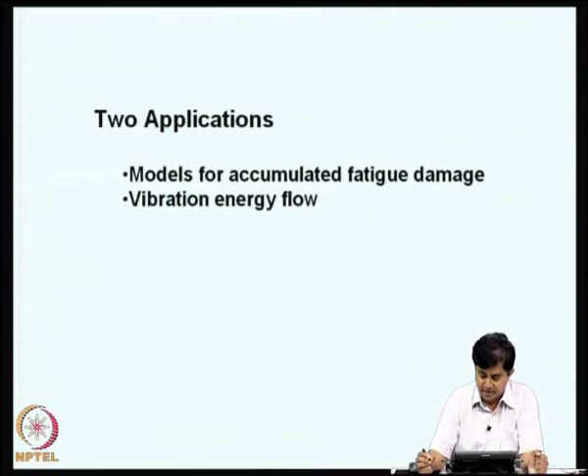We have been discussing application of principles of random vibration to problems in earthquake engineering, and will continue with discussion on applications. In this lecture I will consider two more applications: one is models for accumulated fatigue damage in randomly vibrating structures, and the second is vibration energy flow, which is important for high frequency vibrations of engineering structures. I intend to give a flavor of these two application areas and illustrate how principles of random vibration analysis are employed, not to fully describe fatigue damage or energy flow problems, but to state the basic problem and show how random vibration principles could be used. We will start with the problem of fatigue damage accumulation, beginning with some empirical background.

What is fatigue? Fatigue is loss of mechanical integrity of a structure due to reversal of stresses. Any structural material, even on very fine scales, will have some imperfections and defects. Consequently, the strength of the structural material in a given volume depends on the amount of defect present. When the material is subjected to vibratory loads, there is reversal of stresses, and as a consequence the defects and imperfections grow within a given volume of structural material, reducing its strength. This phenomenon is what is known as fatigue.

Fatigue is essentially a phenomenon involving progressive fracture of a structural member due to repeated cycles of load. It is the primary mode of failure for metals subjected to oscillatory loads, and is a major source of failures in aircrafts, railway vehicles, ships, bridges and rotors. Structural components that can carry high constant amplitude loads fail under substantially lower magnitude fluctuating load, due to fatigue. During fatigue failure, the maximum stress could be well below the tensile strength of the material, but the structure fails after oscillating for a finite number of cycles.

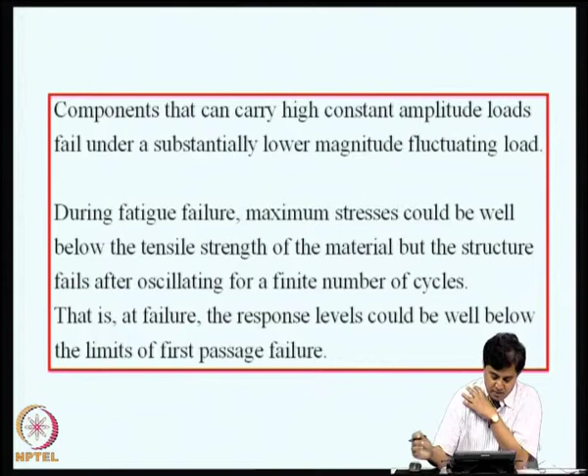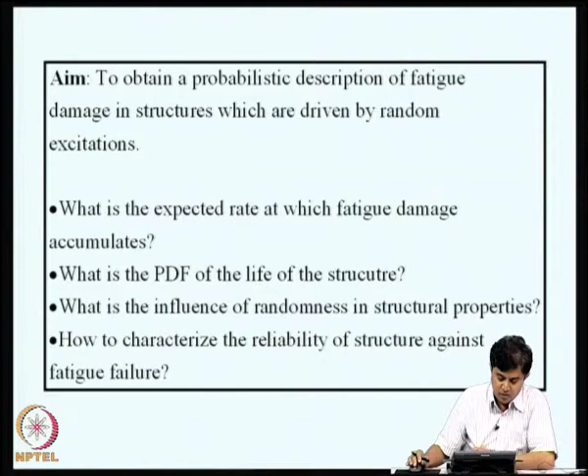At failure, the response level could be well below the limits of first passage failure, so failure could be quite catastrophic. It is important to obtain a rational description of how to model these failures. The objective is to obtain a probabilistic description of fatigue damage in structures driven by random excitation. For example, what is the expected rate at which fatigue damage accumulates, what is the probability distribution of the life of the structure, what is the influence of randomness in structural properties, and how to characterize the reliability of a structure against fatigue failure. We will consider some of these questions and see how we can progress.

If you look at time histories of stresses, various possibilities exist. In the first, there is an oscillatory load about a mean level, meaning the stress cycles are completely reversed - these are called completely reversed cyclic stresses. This oscillation could occur about a non-zero mean, so the cycling occurs about a mean which is not zero, or it could be such that there is no stress reversal, but instead released tension, where the stress never enters the compression zone, remaining tensile while the tensile stress magnitude keeps oscillating.

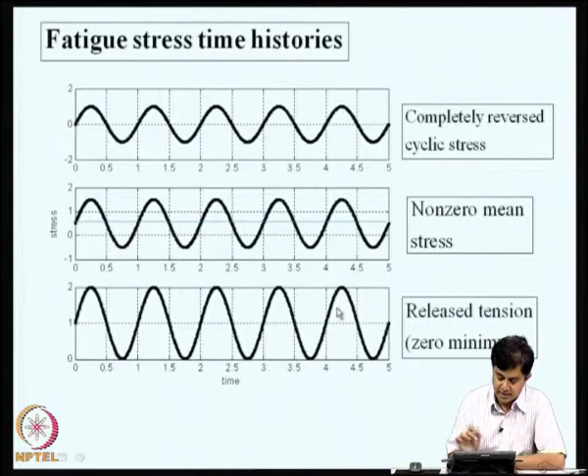We introduce certain terms: S max, S min and S mean are the maximum, minimum and arithmetic mean of the stresses. Delta S is the stress range, S max minus S min, and the alternating stress amplitude is given by delta S divided by 2.

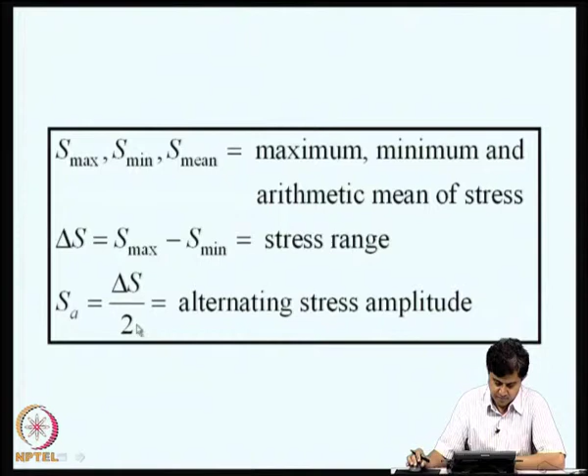The stress amplitude need not be harmonic; the amplitude could vary. For example, here is a stress time history where up to about 1.5 seconds there is one amplitude, and beyond that the amplitude increases. The change in amplitude could also be accompanied by a change in the mean levels about which these oscillations occur - these are varying amplitude, varying mean stresses, or the stress could be randomly varying in time, and could be multi-frequency. Here what is shown is a narrow band random process.

Here, the definition of a cycle is not immediately evident unless we clarify exactly what that is.

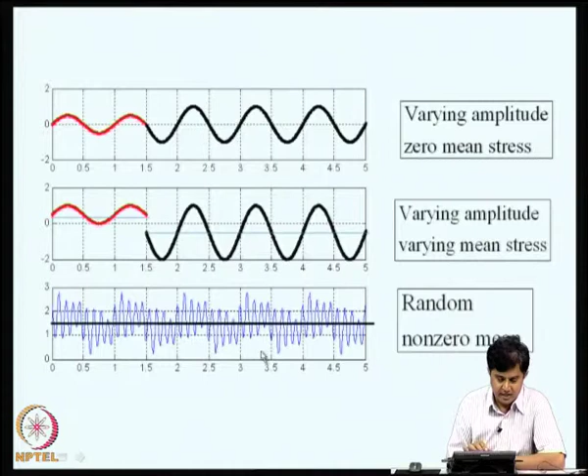Just to illustrate, here I am showing certain measured time histories. For example, this graph shows the time history of strain on a steel girder bridge as a train formation crosses the bridge at a particular velocity. The second graph is a similar result when a longer formation, maybe freight traffic, crosses the bridge. The cycle seen here typically corresponds to the passage of one locomotive and carriage wagon, and these wagons themselves have multiple axles - the small oscillations about a higher level represent oscillations due to passage of axles of the same wagon.

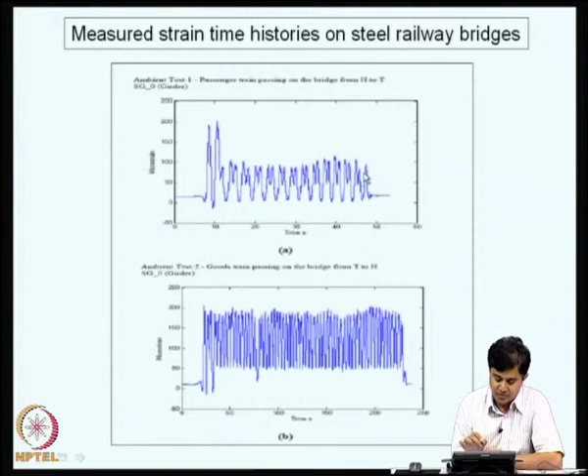Now, we use what is known as SN curves to characterize fatigue failure. This SN curve is essentially a plot of cyclic stress level versus number of cycles to failure. That means if you take a test coupon and subject it to cyclic load at a given stress value, after a certain number of cycles of oscillation, this coupon will fail, and the number of oscillations as a function of stress level is known as an SN curve.

This is something that is experimentally obtained, also known as the Wöhler curve. The test specimen is typically a cylindrical specimen subject to uniaxial cyclic stress, or a small cantilever beam under bending oscillation. The stress amplitudes are kept constant.

We could also simulate actual live stress cycles in a fatigue test, but this is not what we are discussing in this lecture.

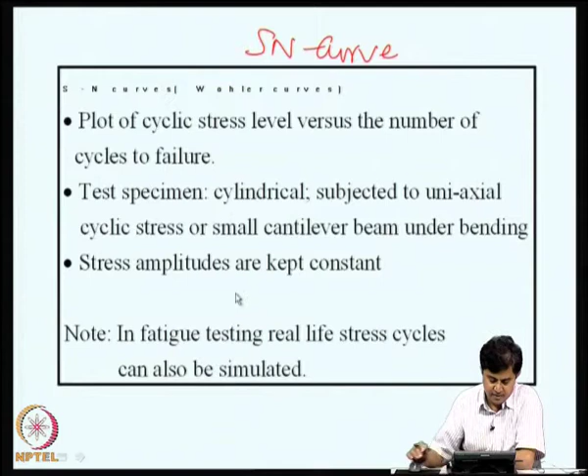A simple model for the so-called SN curves is of this form: n times s to the power of b equals c, where b and c are constants. If you take the logarithm of this, we get log n plus b log s equals log c. That would mean on a log scale the SN curve is a straight line with a slope of minus 1 by b and an intercept of log c.

Now, in reality, below a particular stress level failure due to cyclic oscillations is not possible, and this limit of stress is known as the endurance limit. We are considering stress levels above the endurance limit in our studies.

So the number of cycles from this formula, n s to the power of b equals c, can be written as n equals c into s to the power of minus b for s greater than s naught, and n is 0 for s less than or equal to s naught, if you take into account the effect of endurance limit.

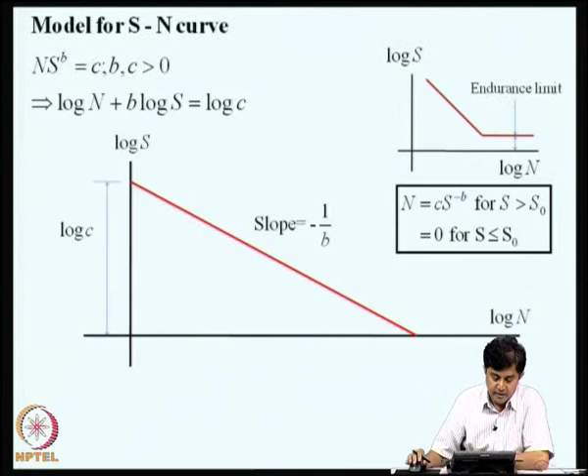Now, in the SN curve approach, it is an empirical approach which does not deal with the physical phenomena taking place within the material that result in loss of mechanical integrity. Actually, it does not separate the crack initiation and crack propagation stages, considering only the total life to fracture.

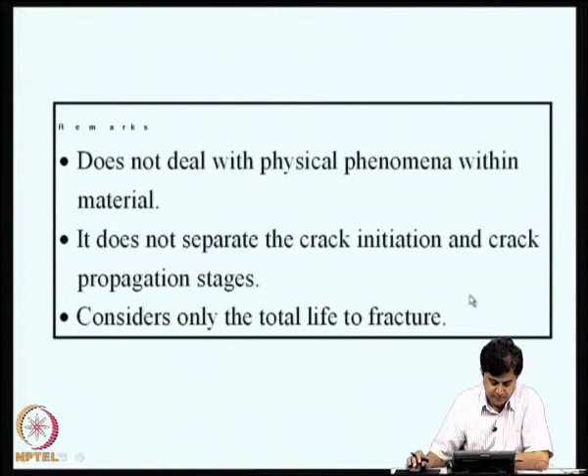Now, we obtain SN curves in laboratory conditions, and then we want to extrapolate this information to field conditions. Laboratory testing is done on coupons, just like how we find Young's modulus of a material using coupons. In the same sense, SN curves are also obtained in laboratory conditions on test coupons, but these results need to be extrapolated to the field condition.

When we do that, factors like non-zero mean stress, varying stress amplitudes, and environmental conditions like temperature, humidity, corrosive media, etc., start influencing the results. The size, shape and surface finish of the member under consideration also have significant influence on fatigue performance. The frequency of cycling could also be important, but many times this is not a very crucial factor.

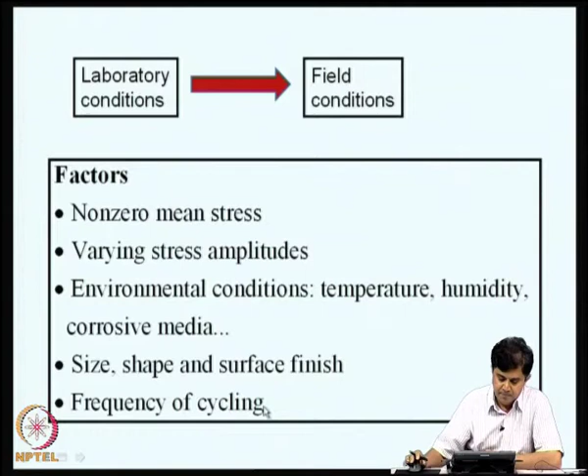In the experimental data, a large scatter is observed. This reflects the influence of uncertainties, and when one plots, for example, the SN curve, if in an experiment there were many trials, a clean straight line won't emerge. So at any given point you can draw a probability distribution curve, a density function, and one can specify the SN curves in terms of SN and probability curves.

This density function could be modeled as log normal or Weibull. The endurance limit, as I have already explained, is the stress level below which the specimen seems to last indefinitely.

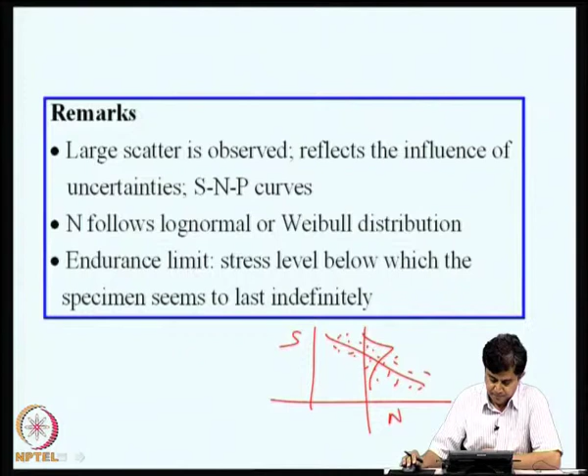Now, we use what is known as the Palmgren-Miner rule to find out accumulation of fatigue damage. Suppose during the life of the structure, on the x-axis I am plotting time and on the y-axis we are plotting stress amplitudes.

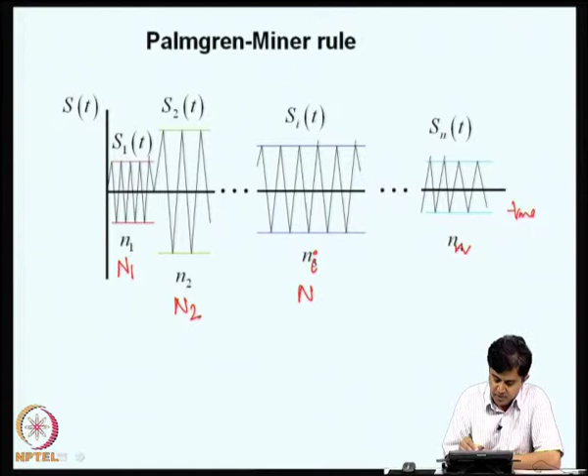Now, according to Palmgren-Miner hypothesis, what we do is we find out the number of cycles at different stress levels. S1 is N1, S2 is N2, S3 is N3 and so on. And for this stress level from the S-N curve we get the number of cycles to failure. We define an incremental damage as the ratio N1 by capital N1. Similarly, incremental damage at stress level S2 is N2 by capital N2 and so on.

We define what is known as cumulative damage as the sum of these incremental damages at any given stage. For example, at the end of application of stress level S2 for N2 number of cycles, the accumulated damage would be N1 by capital N1 plus N2 by capital N2.

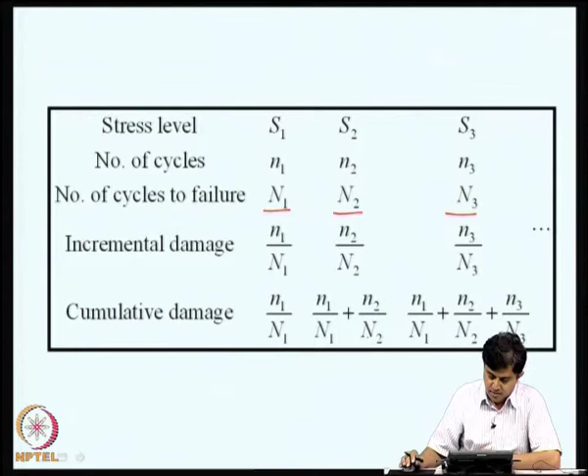Now, according to the Palmgren-Miner hypothesis, at the end of the mth cycle of oscillation, we get the accumulated damage as capital delta, summation i equal to 1 to m, Ni by capital Ni. Now, if I use the formula for the S-N curve, I can write this as Ni Si to the power of B by C, because capital Ni is related to Si and the constants B and C.

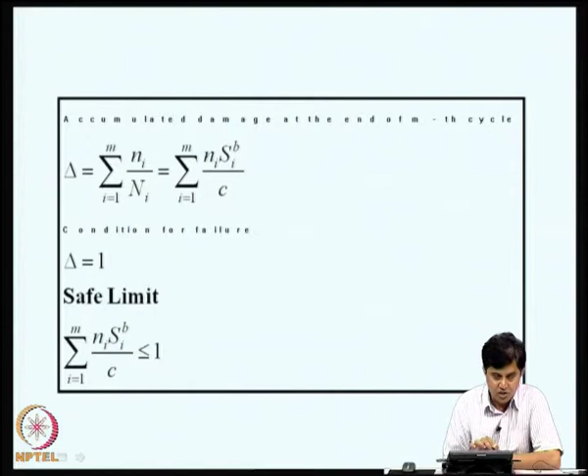According to the Palmgren-Miner hypothesis, the condition for failure is that this cumulative damage should reach a value of 1. So consequently, the safe limit is: summation i equal to 1 to m, Ni Si to the power of B divided by C, must be less than or equal to 1. If this Miner's sum crosses 1, the specimen is deemed to have failed according to this theory.

A few remarks on the Palmgren-Miner theory could be made. In this theory, the order in which stresses are applied does not matter, meaning the damage is assumed to take place in a linear manner. In reality, failure is sensitive to order of loading. A high stress level followed by a low stress level would produce accumulated damage of a different kind than the other way around, where a low stress cycle is followed by a high stress cycle.

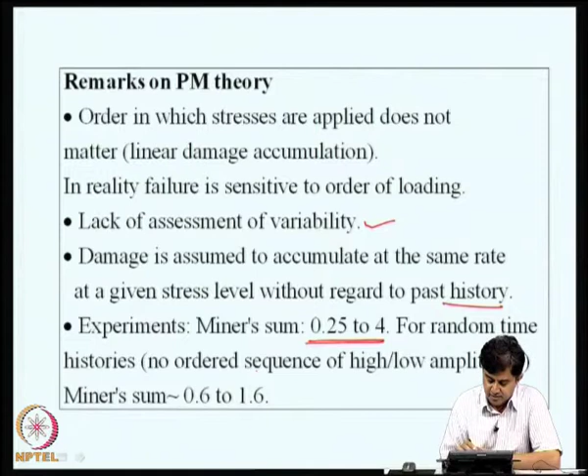The method as such does not provide any means of assessing the effect of variability in constants B and C, and damage is assumed to accumulate at the same rate at a given stress level without regard to past history, meaning it does not take into account memory. In actual experiments, the Miner's sum at which failure has occurred varies over a fairly large range, 0.25 to 4 under harmonic loading. But for random time histories where no ordered sequence of high and low amplitudes exists, the Miner's sum is reasonably good, 0.6 to 1.6.

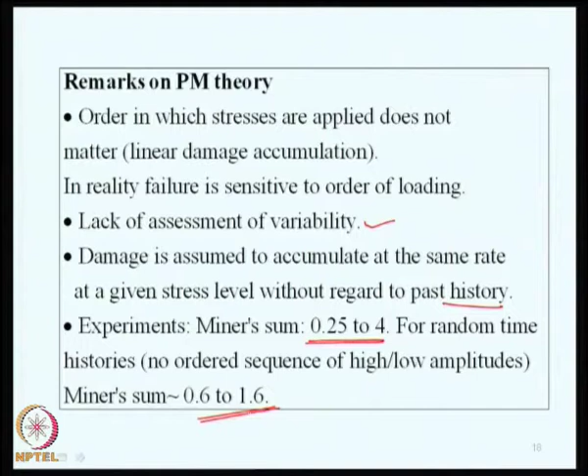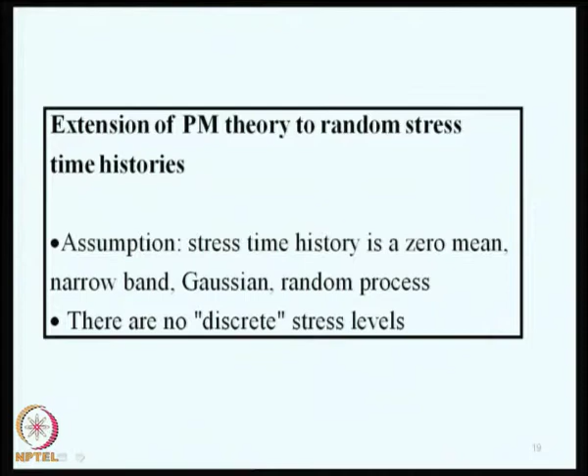Now, the question is, we are not so much interested in the limitations and scope of the Palmgren-Miner hypothesis. What we would like to consider is how we can extend the Palmgren-Miner hypothesis to random stress time histories. Let us assume that the stress time history is a zero mean narrowband Gaussian random process. Consequently, if you consider stress to be a time history, there are no discrete stress levels here - nor are there harmonics of different amplitudes following each other? So how do we proceed?

Here what we define is a function d of t, which we define as the integral from 0 to t of chi of t dt, where chi of t is the rate of accumulation of damage. This we write as n of t into s to the power of b of t, divided by c, and this is fashioned after the formula for accumulation of damage given by Ni Si to the power of B divided by C.

Now, the question is, if s of t is, as I said, a zero mean narrowband stationary Gaussian random process, how do we interpret these quantities? If the stress time history is a random process, how do we interpret s of t and n of t in this expression? So what we do is we take s of t to be the peak magnitude and n of t to be the rate of peaks, and these we have studied already.

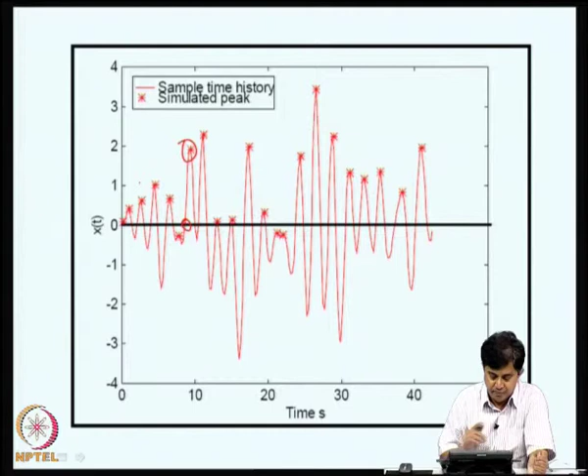For a narrowband process, the rate of peaks is the same as the rate of zero crossings. That means every time a zero is crossed, there will be a peak, as you see here - for example, if there is a zero crossing, there is a peak. So that is a property of a narrowband process. This is not true for a wideband process, but to start with, we will limit our discussion to narrowband processes. Now, our objective is to characterize the function d of capital T.

We are interested in knowing, for example, what is the probability that D of capital T is less than or equal to 1. That is a question we would like to answer.

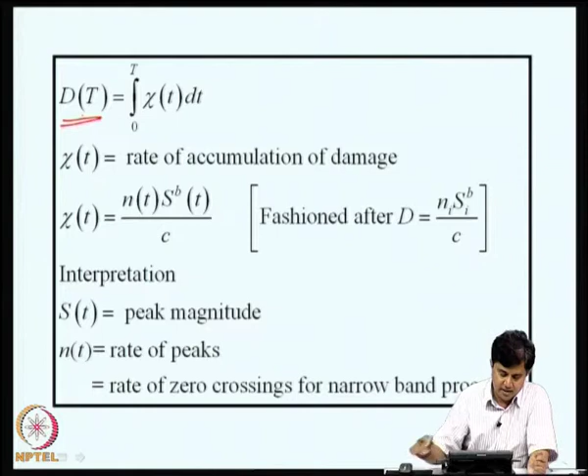The joint density function of S and N is actually not available. What we do know is that peak magnitudes are Rayleigh distributed for narrowband processes, and the expected value of N is given by sigma 2 divided by 2 pi sigma 1, where sigma 2 is the standard deviation of the derivative of the process and sigma 1 is the standard deviation of the parent process.

We make an ad hoc assumption that S and N are independent, so the joint density function Psn(S,N) is the product of the marginal density functions. Based on that, we find the expected value of chi of t, the rate at which damage is accumulating, and since we know this expression and this probability density function, we can write this formula for the expected value.

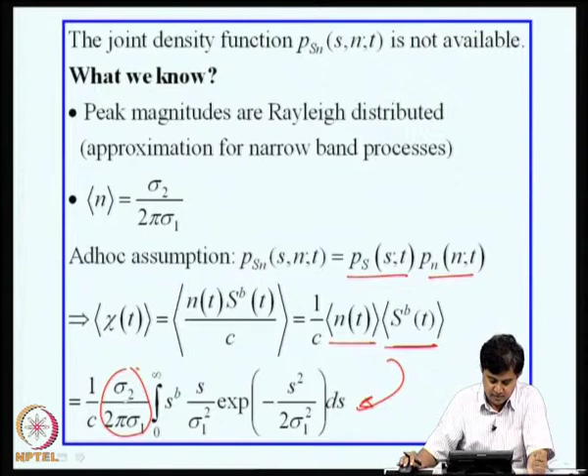This is the Rayleigh density function. Consequently, this will be the expected value of S to the power B, and this quantity is the actual expected value of N of t, which is known from the study of level crossings and zero crossings of random processes. We recall that integrals of the type 0 to infinity y to the power of 2 nu minus 1, exponential minus y squared, dy, are given by the gamma function.

Consequently, we can express the expected value of chi of t in terms of the gamma function, and this is what we get. So at least, with certain ad hoc assumptions, we are able to proceed and get the average rate at which fatigue damage is accumulating, in terms of the standard deviation of the parent process, the standard deviation of the derivative process, and the material constants C and B.

Now we can return to the problem of finding the expected value of D of t. If the process is stationary, sigma 2 and sigma 1 are independent of time, so they can be pulled out, and the integral from 0 to t becomes this. So we have this expression for D of t, the average accumulated damage at time instant capital T.

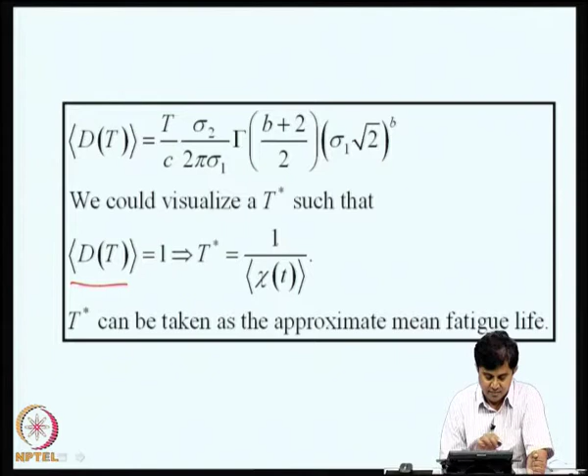Now we could visualize a t-star such that this expected value of D of t becomes 1. If we do that, t-star will be 1 divided by the expected value of chi of t. So, to a first approximation, we can take t-star to be the mean fatigue life.

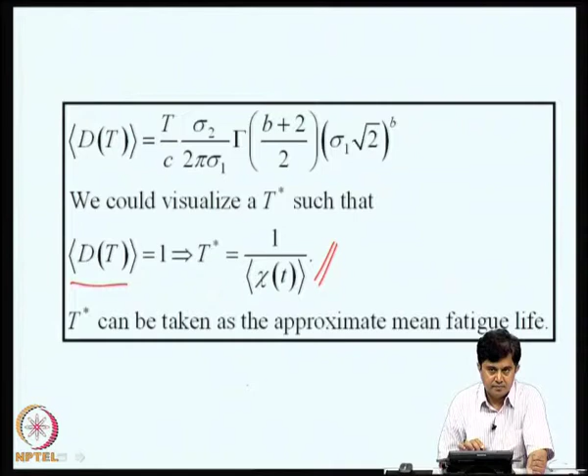So if you know the random stress time history and its power spectral density, you can derive the variance of the process and its derivative process, and using this formula, you are at least in a position to evaluate the mean fatigue life. This is for a stationary, narrowband Gaussian random process.

Now a few remarks are in order. In this derivation we have taken the constants B and C to be deterministic, but if you know the joint probability density function of B and C, you could incorporate that into the analysis. The expectation we have obtained can be interpreted as a conditional expectation, and the unconditional mean can be evaluated by integrating with respect to the joint probability density function of B and C.

It is worth considering the question: is T-star indeed the expected fatigue life? Now this needs to be considered carefully.

For that purpose we will consider capital L to be the lifetime, a random variable. The condition for failure, that is the definition of capital L, is that the integral from 0 to L of chi of t dt equals 1. That means the expected value of this integral, 0 to L chi of t dt, is 1.

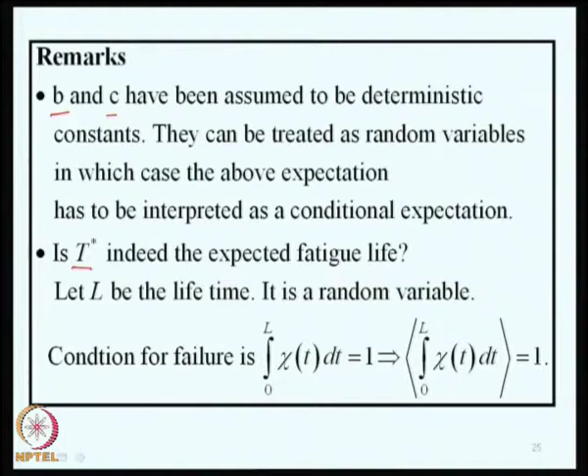Now this is a condition that we actually need to analyze, but what we have done is we have replaced this integration.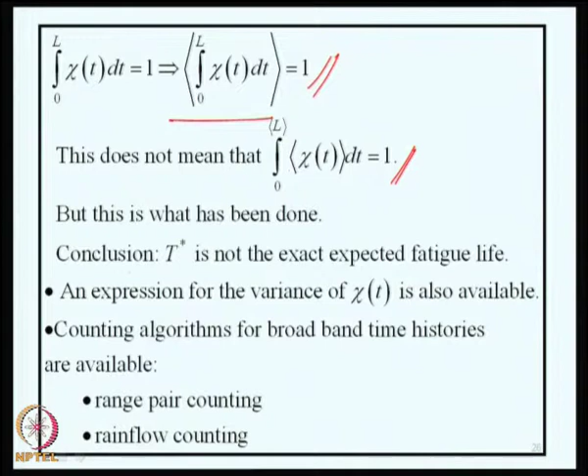The random quantities in this expression, L and chi of t, are mutually dependent, so this integral is not equal to the integral from 0 to mean of L of the mean of the integrand dt. That's not actually the condition we're looking for, although it's what we seem to have utilized. So the conclusion is T star is not the exact expected fatigue life, but to a first approximation we could take it as an acceptable estimate. To evaluate this integral exactly, we would need adequate information on the uncertainties, which we do not have, so we will not be able to proceed further.

We have now derived the expression for the expected value of chi of t. With little effort we can also derive the variance of chi of t, and we can also derive the variance of capital D of t.

We have based our assumption on the fact that the stress time history is a narrow band process. If the process is broad banded, the notion of a cycle and amplitude becomes less apparent, as I already said, but there are algorithms for counting cycles, such as range pair counting, rain flow counting, etc., and one could also deal with broadband time histories using them.

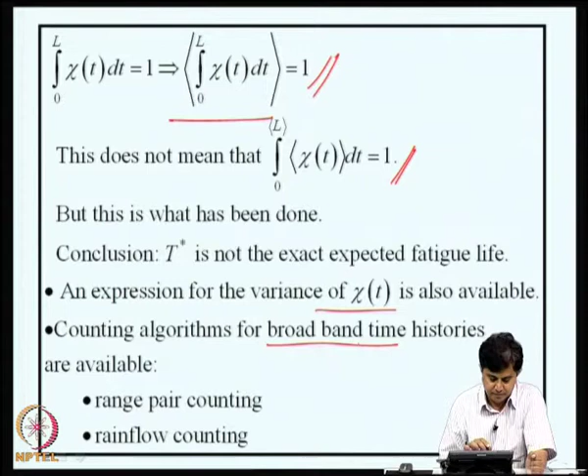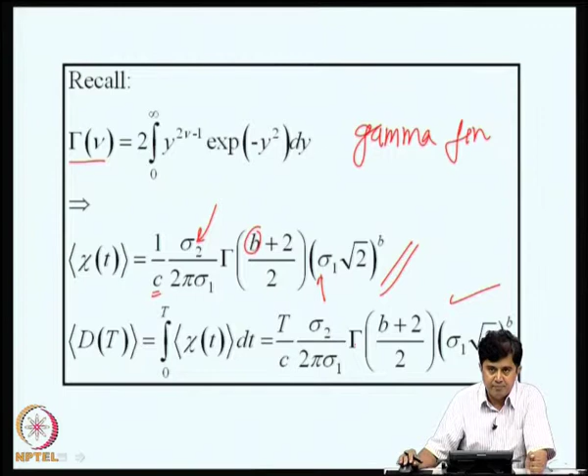So what I have done in this brief presentation is to illustrate how properties of level crossing and peak distribution, etc., could be utilized to get a theoretical estimate of the average expected life when failure is defined with respect to fatigue.

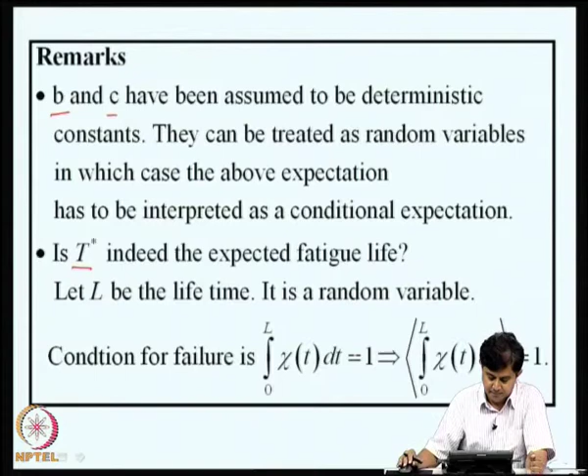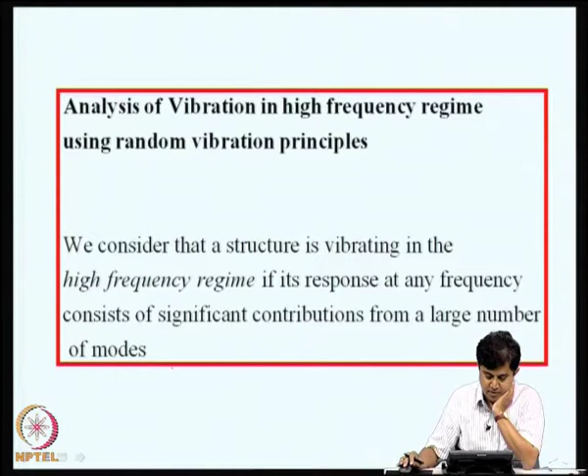Now we will move on to another application: analysis of vibration in the high frequency regime and how we can use random vibration principles for this. What is high frequency vibration? We consider that a structure is vibrating in the high frequency regime if its response at any frequency consists of significant contributions from a large number of modes. Now what are the basic difficulties in such problems?

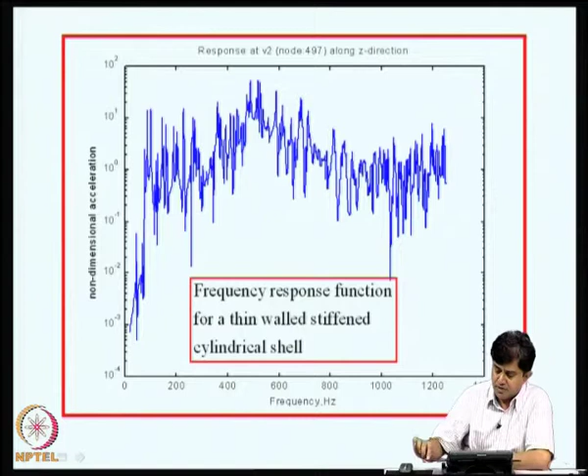For purpose of illustration, I have shown here the frequency response function of a thin walled stiffened cylindrical shell, and as you can see there are several peaks which are closely spaced. We know that in frequency response functions peaks occur wherever there is a natural frequency, and their variation is also governed by the value of mode shapes at the point of driving and the point of measurement. So if we consider segments like this, it is very clear that there are a large number of natural frequencies crowded in this frequency range.

So if you were to drive the system harmonically at a single frequency, it is expected that to compute the response we need to consider contributions from several neighboring modes. In that sense we call this type of oscillation high frequency oscillation.

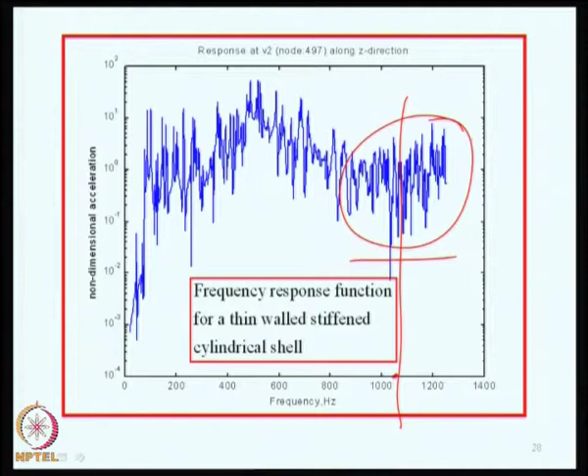This is not true, for example, in the case of earthquake response of tall buildings, but in the acoustic response of missile shells or aircraft wings etc., there will be a large number of natural frequencies in the frequency range that we are interested in. I will clarify the nature of the problem as we go along.

There is one approach to study such high frequency vibration known as energy flow models, and one of the techniques or methodologies there is what is known as statistical energy analysis, a framework for high frequency vibration analysis.

The structural behavior at high frequencies is very sensitive to minor changes in structural parameters and details of modeling. A deterministic approach to modeling structural system parameters is inappropriate. That means if a structure is undergoing high frequency oscillations, a slight change in, say, boundary conditions or some of the parameters of the problem will dramatically alter its behavior. So the essence here is that we need to consider this extreme sensitivity of the response with respect to changes in system parameters.

Description of dynamic behavior of structural joints becomes difficult with increasing frequencies. This calls for experimental approaches to characterize structural behavior of joints. In a typical structure like an automobile vehicle or aircraft structure, there will be several joints, line joints, point joints, etc., and their behavior at high frequencies becomes quite complicated. If you use methods like the finite element method, modeling the flexibility of the joints becomes a very complicated issue as you go higher up in frequency. So statistical energy analysis procedures essentially take into account these difficult issues.

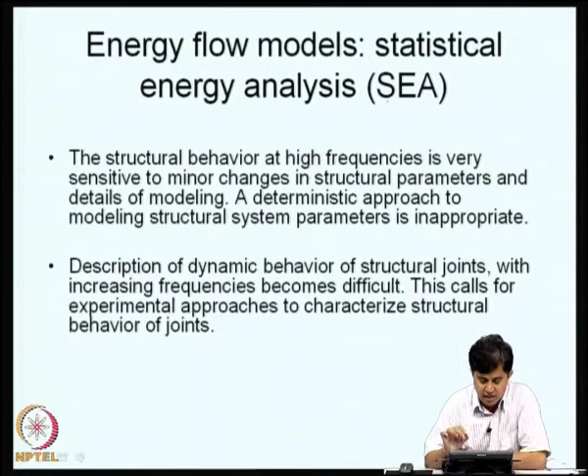The first thing statistical energy analysis does is treat the vibrating system as being randomly parametered, meaning the natural frequencies and mode shapes of the structure are treated as random in nature. The word statistical in statistical energy analysis refers to uncertainties in specifying the system parameters. The excitations could be random or could be deterministic. So the stochastic nature in these problems originates due to randomness in system properties.

In such problems, detailed characterization of structural response in terms of spatio-temporal variations of displacement, stress and strain fields becomes unwieldy. A macro level description that involves space, time, frequency averaged response quantities such as vibration energy content in spatial domains within a structure may be adequate.

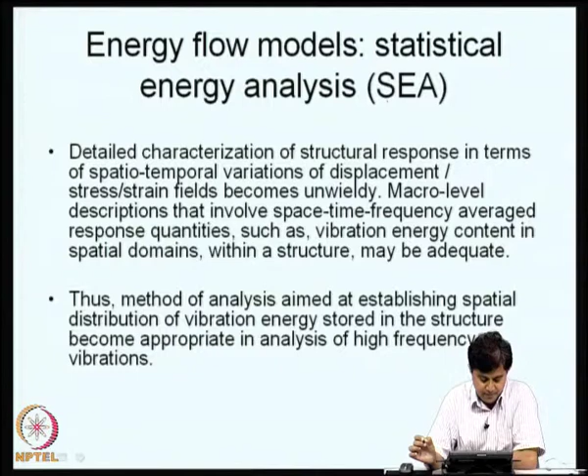So the method of analysis is aimed at establishing spatial distribution of vibration energy stored in the structure as a function of frequency.

So I will just illustrate what I said. Consider a simple truss here which is carrying a force f of t. Let us assume that the frequency range of f of t spans several decades of frequencies. It may go up to a few tens of hertz to a couple of thousand hertz.

We could use finite element method to analyze this problem, but then if we need to compute the natural frequencies of this structure over a frequency range of say 2 kilohertz, there could be several, maybe hundreds or a couple hundred natural frequencies which could lie in that frequency range.

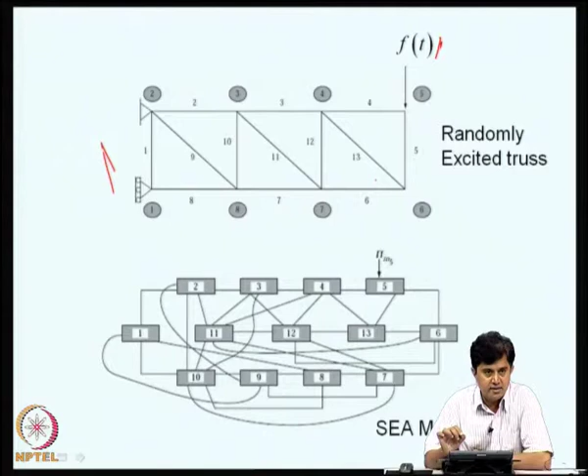Now, if we indeed perform this, that would mean we need to model this structure in greater detail. We need to select elements which are quite small in size, and we should have a large number of such elements. That in turn requires that we should be able to know the property of the structure at smaller spatial levels, and that may not always be possible.

Similarly, the question of how does this joint behave as the frequency increases becomes crucial. So any slight change in system parameters here can dramatically alter the behavior of the system.

So therefore, if we are interested in, for example, displacement, stress or strain at any given point in the structure, we end up doing a huge amount of calculation. But that type of information may not be needed to take decisions in this type of problems.

What we may like to know is what is the total energy that resides in this member, or how does the total energy get spatially distributed in the system.

For that purpose, what we do is we divide this truss into a set of subsystems, each one an energy carrying unit, and we would like to consider the problem of force into velocity. Here will be the power input to the system.

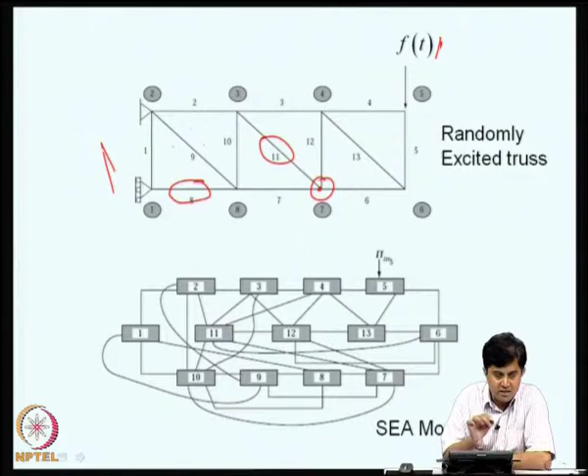That power should be stored at various points in the structure, and we ask which are the more energetic members, and if that level of energy is high, how do I reduce it, and what are the vibration paths that take this energy to different parts in the structure. So this type of questions are asked in statistical energy analysis.

So statistical energy analysis can be viewed as a branch of linear vibration theory with some of the following characteristic features.

Here the built up structure is taken to be random in nature. It is divided into a set of subsystems, and the subsystem natural frequencies are taken to be identical and independent random variables distributed uniformly in the frequency range of interest.

That would mean the natural frequencies of the subsystems are taken to constitute Poisson points on the frequency axis. That means the number of natural frequencies is a Poisson random variable.

The external excitations, which are often random in nature, are specified in terms of power input, and the governing equations for system behavior are described in terms of power balance between subsystems. We do not write the equilibrium equation the way we do in finite element method; we simply keep track of energy balance. I will come to some details.

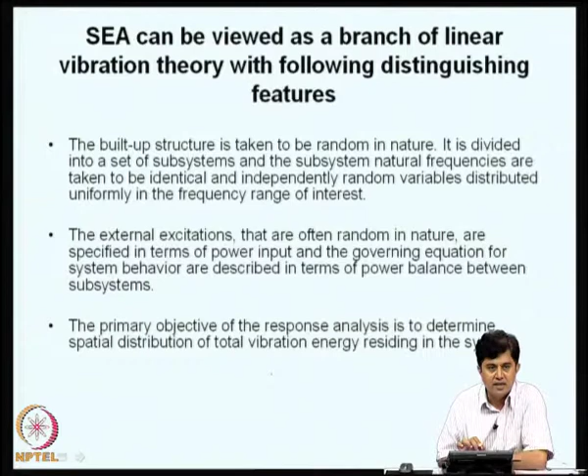The primary objective of the response analysis is to determine the spatial distribution of total vibration energy residing in the system. It is not to obtain, for example, time histories of stresses, strains and displacement at every point on the structure. Here it is a macro level description where certain spatial extents are identified as subsystems, and what happens within that spatial extent, in terms of a single number, is what is being sought.

Here are some references: there is a book by Lyon and DeJong, Theory and Application of Statistical Energy Analysis, and there is an introductory paper and a review paper which provide some background to this subject.

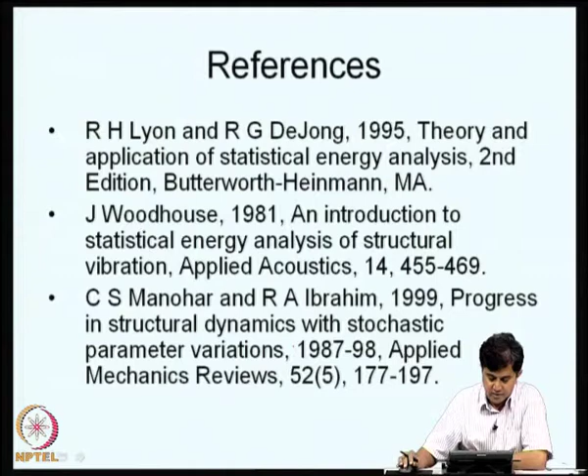Here is another example where there is a stack of 3 plates. This could be a typical situation in solar panel arrays in satellites. This e raised to i omega t is a forcing function that acts on this, and this frequency can cover several ranges, it could run from 20 hertz to say 2 kilohertz. What we are interested in knowing is, under this kind of excitation, how does vibration energy reside in different parts.

So we could model this in terms of subsystems as shown here. 1, 6 and 11 correspond to these 3 plates.

This 1, 6 and 7, 1, 6 and 11 correspond to the 3 plates, and 2, 3, 4, 5 and 7, 8, 9, 10 are these coupling members.

We are not interested, let me again emphasize, in finding stresses, strains and displacement at various points on the structure.

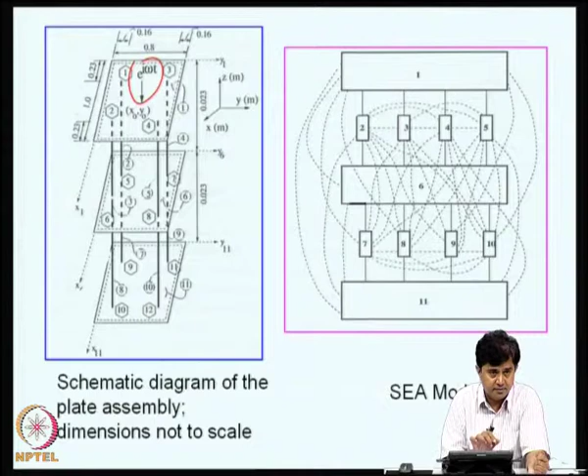Now, how do we specify inputs in statistical energy analysis? We do not give time history of the force, but we would like to provide the input power. This input power is derivable in terms of the input power spectrum and the input point receptance. That means force into velocity, applied force into velocity in the direction of the force, is the power. Force into displacement is the work done, and work done per unit time is the input power, and in terms of a spectrum, you have to do certain calculations.

Now, we consider the inputs to be in the high frequency range, say 20 to 20 kilohertz. These excitations could be random or they could be deterministic also. It is not important that the randomness resides in the excitation; the randomness is in the system parameters.

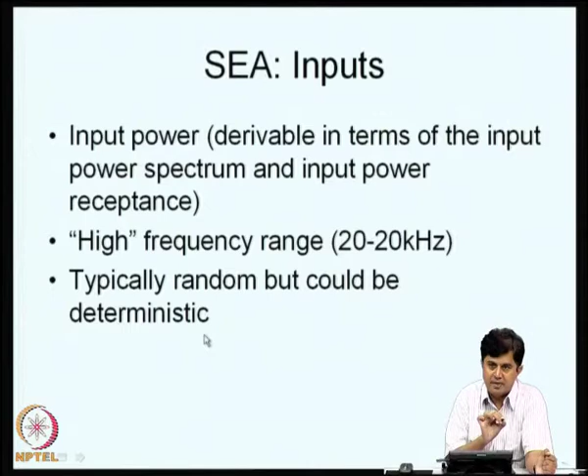How do we model the system? We model the system as a collection of energy storing elements called subsystems. They are not like finite element elements, but they involve much more macro level description of the system behavior.

We focus only on linear and randomly parametered systems. The behavior is linear, but the system is randomly parametered. This randomness in system parameters could be introduced at the level of definition of mass, stiffness and damping.

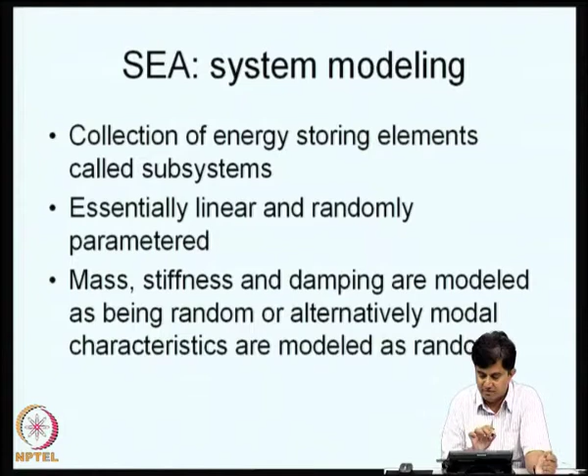Alternatively we can directly characterize the natural frequencies and mode shapes of the subsystems as being random. We need not specify mass, stiffness and damping as random, but since the solution is obtained in the modal domain, modal parameters like natural frequency, mode shapes, participation factor, modal damping etc. could be taken as random.

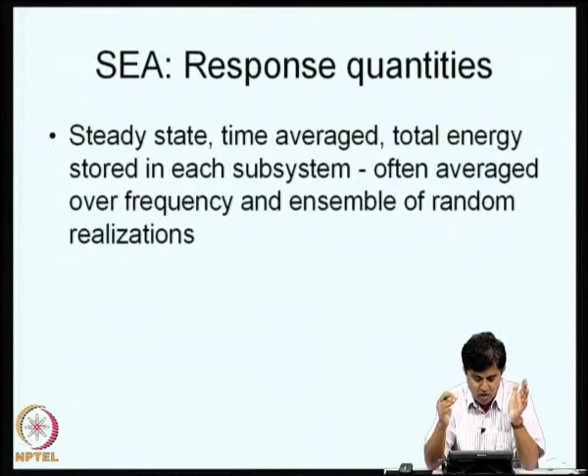And what are the response quantities we look for? We look for steady state, time averaged, total energy stored in each subsystem, often averaged over frequency and ensemble of random realizations. That means we are looking for grossly averaged features, not details. It is average over time, average over space, average over frequency band, and it gives a broad idea about the different levels of energy that reside at different levels.

How do we derive the governing equation? What are the governing equations in SEA? The governing equation in SEA represents a condition of power balance, and it has the form: the vector of power input is equal to a matrix multiplied by the energy residing in different subsystems. This matrix is known as the coupling loss factor matrix. I will talk about this shortly. This is essentially a representation in the steady state. We do not normally consider transient behavior using SEA, and the whole analysis is done in the frequency domain.

Now we can ask, are there any theoretical foundations for this procedure? Actually there is no such rigorous theoretical foundation. There is no variational principle from which we can derive SEA equations, nor is there any systematic proof that as we increase the number of subsystems in the SEA formulation the answer would converge. So it is not like a method such as the finite element method, but it is a heuristic procedure which is found to work well when other methods do not perform.

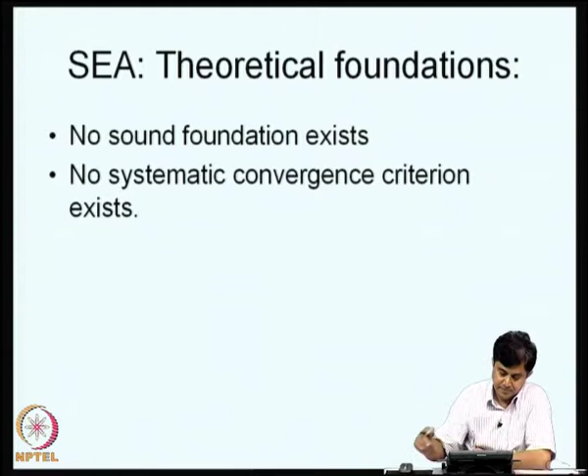Now, having said that there is no theoretical basis, there exists an idealized situation where the basic results of statistical energy analysis can be shown to hold good. So what is that system? There is a simple system.

There are two oscillators which are coupled through a coupling spring. The two oscillators are driven by F1 of t and F2 of t. These are taken to be independent Gaussian white noise processes. Now the question we would like to answer is: F1 of t will do some work on this displacement, therefore there will be a power input here and a power input here, and how does vibration energy get shared between this subsystem and that subsystem.

So what we do is model the problem using two subsystems. This is one oscillator, this is the second oscillator, and there is a coupling Kc, and please note that the coupling element does not have damping - it is a conservative coupling. So what happens is: there is a power input to the first system through F1 of t, part of the power is dissipated through damping, and part of the energy flows to the second subsystem.

In the second system, because of F2 of t, there is some power input, part of which is dissipated and part flows to subsystem 1. So we set up the equation: pi in 1 equals pi 1 2 minus pi 2 1 plus pi dis 1. So pi in 1 must be equal to this.

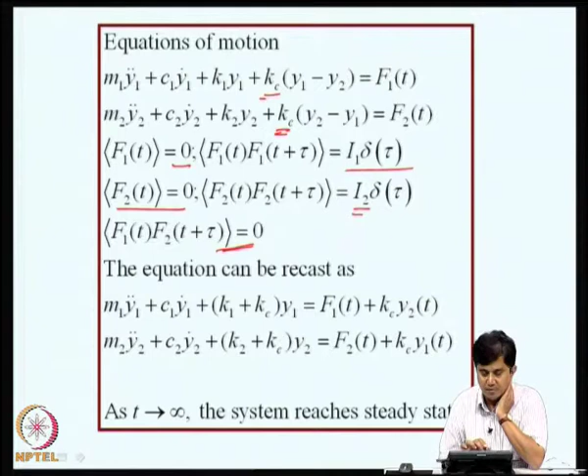That means they are independent since we are assuming Gaussian white noise models. The equation can be recast in this form, taking the force acting on the first system through the coupler on the right hand side. Since the system is damped, we assume that as t tends to infinity the system reaches steady state, the input is stationary, and the system is damped.

Now we will digress for a moment. If you consider a single degree of freedom system under white noise excitation, in steady state, if you want to find the cross power spectral density function between displacement and applied force, this can be derived in terms of this well known expression. The Fourier transform of the response is related to the Fourier transform of the input through the system transfer function, giving Sxf of omega equals h of omega into Sf of omega. Since excitation is white noise, I get this as h of omega into S naught.

Now what is the cross covariance? It is the Fourier transform of this, so I get this expression. At tau equal to 0, I will get Rxf of 0, obtained by putting tau equal to 0. The integrand is nothing but the Fourier transform of the impulse response function. So Rxf of tau is S naught h of tau by 2 pi.

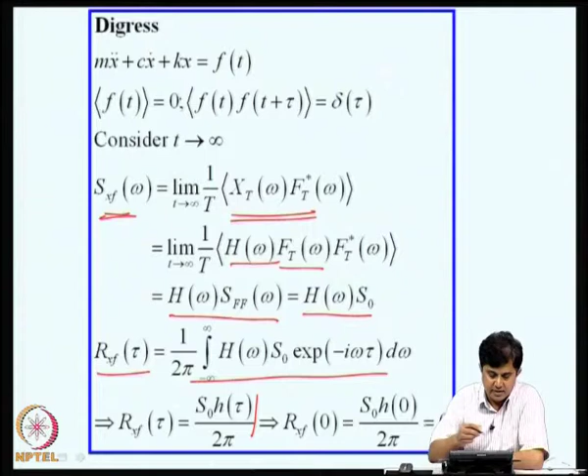Now in this, if you put tau equal to 0, I get Rxf of 0, which is S naught h of 0 by 2 pi. We know by definition h of 0 is 0, therefore Rxf of 0 is 0. So that result I will be using, this is a minor digression to make sure it registers in your mind.

Now we can consider certain expectations. F1 of t into y1 of t is 0, using the logic just described. We can also show some of these are 0, and since the process is stationary, the process and its derivative at the same time are uncorrelated, so these expectations are also 0. Expected value of y1 into y1 double dot, using this formula, can be shown to be given by this.

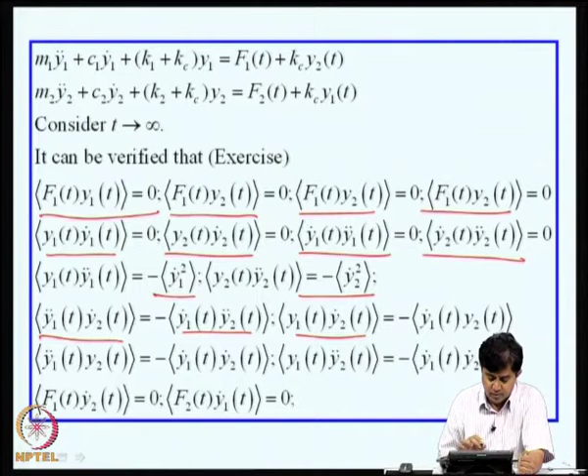We have several other expectations needed when working with these equations, and I leave it as an exercise to verify each of these statements. These are already covered in the lectures, so it is a good time to check your understanding by showing that each one of these statements is true.

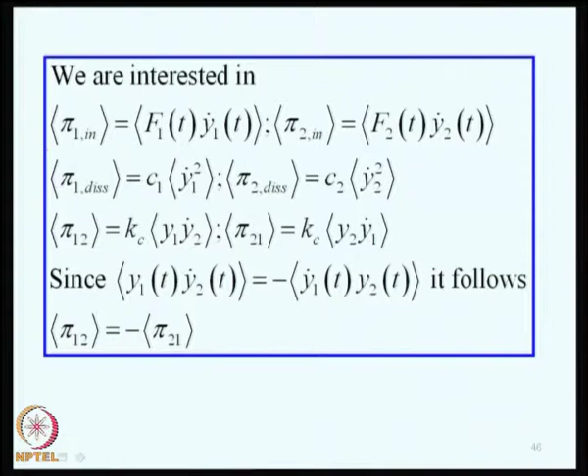Now what are we interested in? The average power input, that is expected value of pi 1 in. What is power input to the first mass? Applied force F1 of t into dy1 gives the work done, and into dy1 by dt gives the work done per unit time. So expected value of pi 1 in is nothing but expected value of F1 into y1 dot. Similarly pi 2 in will be F2 into y2 dot. What is power dissipated? It is C1 y1 dot square. Pi 2 dissipated is similar.

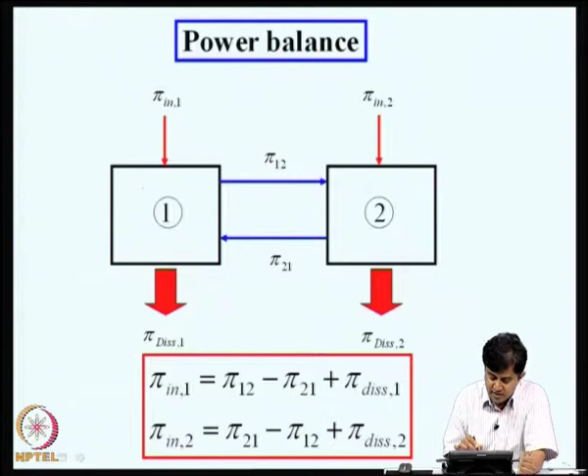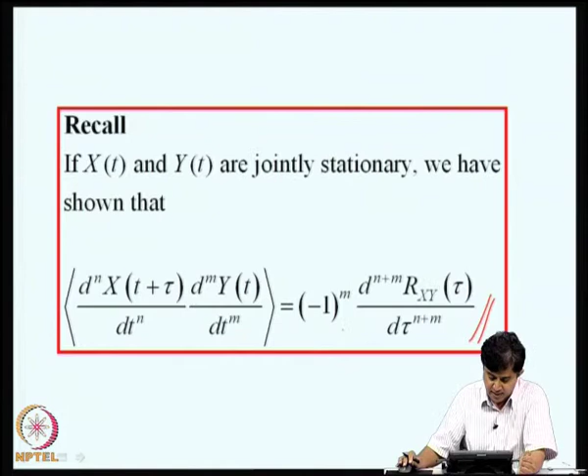What is Pi 1 2? Pi 1 2 is the force in the spring acting on velocity of this. So that would, you can show that would be given by Kc into y1 into y2 dot, and Pi 2 1 will be Kc y2 into y1 dot. Now since y1 y2 dot is equal to minus y1 dot y2, it follows that Pi 1 2 is equal to minus Pi 2 1.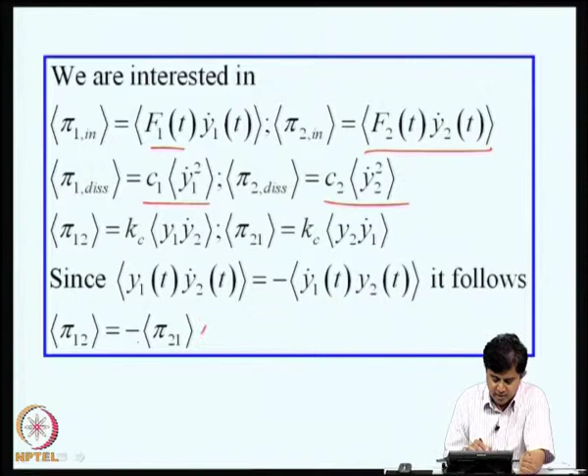Now we can recast all these equations in a matrix form. On the left side I have Pi 1 in, Pi 2 in, and all other expected values. You have to recast that set of equations in this form, and we get this equation. This is a straightforward representation of the equation we considered just now.

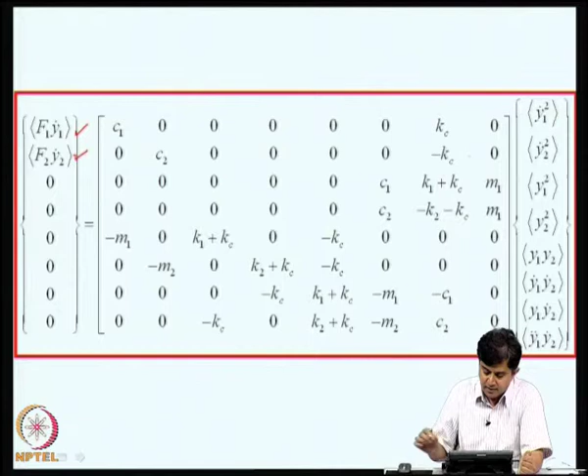Now in this we will consider some of the rows. If you consider the first two rows, I get C1 into y1 dot square expected value plus Kc into y1 y2 dot is equal to F1 of t into y1 dot. Similarly C2 y2 dot minus Kc into y2 y1 dot is this. These two equations are nothing but the statement of law of conservation of energy, that is Pi 1 dis plus Pi 1 2 is Pi 1 in, Pi 2 dis minus Pi 1 2 is Pi 2 in. So things gel well, there is no problem.

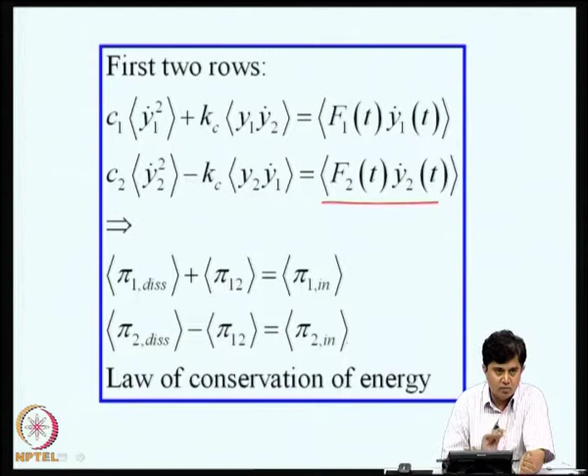Now if we assume that this coupling spring is much smaller than K1 or K2, that means the coupling is weak. This is one of the assumptions made in statistical energy analysis. And if you now consider expected value of y1 into y2 dot, you can derive this expression, and you have to carefully look at this expression. This is expected value of y1 into y2 dot, which is nothing but expected value of Pi 1 2 multiplied by that Kc. We denote this multiplier,

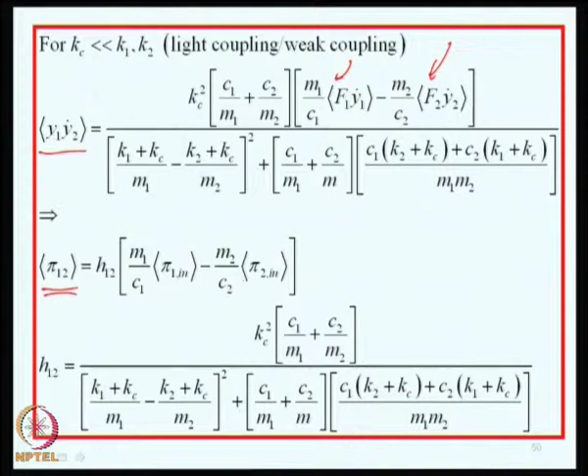see the term inside this bracket is of importance. You can see that this is M1 divided by C1 into expected value of Pi 1 in, and this is M2 by C2 into Pi 2 in, the second term. So what this is telling is that the energy flow from 1 to 2 is proportional to the difference in energy, or difference in the power input, between the first and the second system, with some scale factor. Now we will manipulate this and see what it tells us.

Now again under the assumption of light coupling, we can show that the power input in steady state is dissipated by the system, that is C1 y1 dot square. So I can write for Pi 1 in, 2C1 by M1 into KE1. Similarly, expected value of Pi 2 in can be given by this expression, and we use the fact that in steady state average kinetic energy and average potential energy for the two systems are equal, and if I now substitute, I get what is known as a fundamental statistical energy analysis result, namely that average energy flow is proportional to the difference between the energy in the two subsystems.

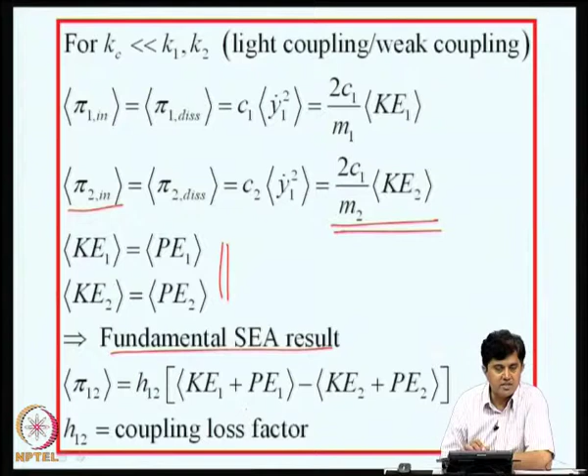That means, just like thermal energy flows from hot spot to cold spot, the vibration energy also flows from places of high energy concentration to low energy concentration. So this is the essential fundamental result of SEA, and this has basis in random vibration principles. That is what I am trying to discuss. Only that aspect of SEA is what I am discussing.

Then we have considered two oscillators. Now, what happens if there are two continuous systems? For example, a plate is coupled to a cantilever beam. This plate itself is a multimodal subsystem.

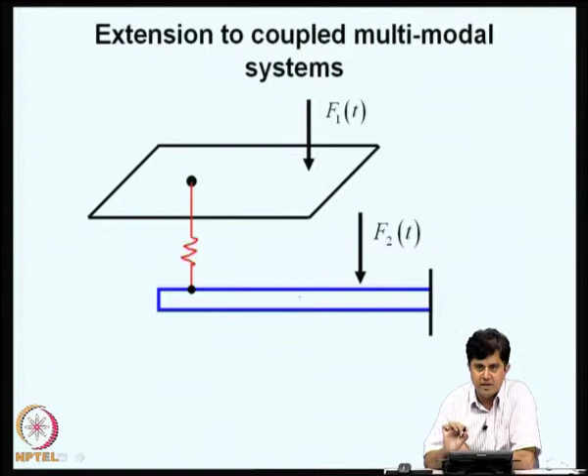It has several natural frequencies. In its uncoupled state, if I were to perform a modal analysis, in the frequency range of interest there may be several modes. That means this plate will be represented by a set of single degree of freedom systems corresponding to the normal modes, the independent generalized coordinates of this plate. Similarly, the cantilever beam also can be represented as a set of oscillators. Now, we notionally represent it like this.

This first picture here is a plate, and these are the oscillators that correspond to the generalized coordinates in the frequency range of interest. Similarly, this is a beam where there are a few more oscillators here which correspond to the generalized coordinates of the cantilever beam. This system receives some power pi 1 in, and it dissipates some power pi 1 dis. Similarly, this system receives pi 2 in and dissipates pi 2 dis.

Now, we have studied how energy exchange takes place between two oscillators. What we do is assume that the energy flow from plate to cantilever consists of energy exchange between the oscillators in this set with oscillators in this set. That means this oscillator exchanges energy with this and this, and similarly this oscillator exchanges energy with all the oscillators here. So all these oscillators exchange energies.

Now, the average power flow from alpha to beta, that means plate to the cantilever, is given by a constant multiplier, which is again dependent on the plate and cantilever characteristics, and in some sense an energy difference between the two plates, that is total energy divided by number of oscillators that are participating. What is the energy density or the concentration of energy is total energy divided by number of oscillators.

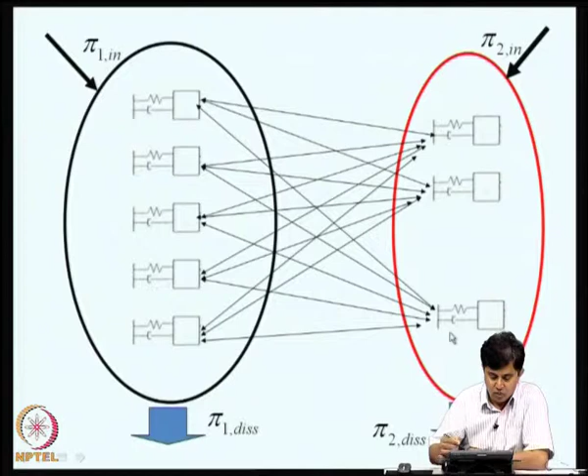It is like temperature in thermal analogy. A hot spot means total energy divided by number of modes is high, so the flow takes place from hot spot to cold spot, and that energy flow is proportional to the energy difference, and this proportionality constant involves the properties of the structure.

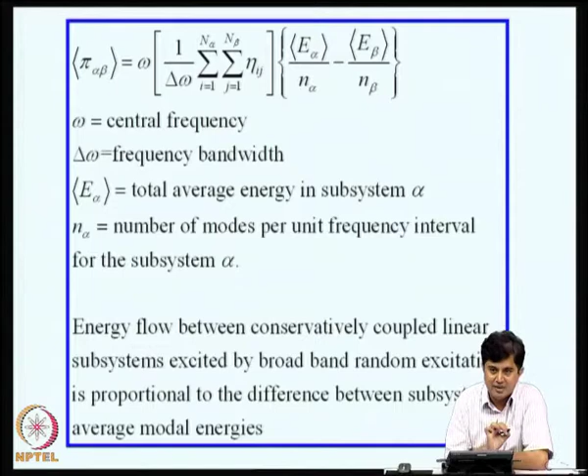So, what this means is energy flow between conservatively coupled linear subsystems excited by broadband random excitation is proportional to the difference between subsystem average modal energies. Now, these proportionality constants are known as the coupling loss factor matrix, the elements of which have to be determined, and in this particular case, when we discuss two oscillators, we derived this.

H12 that is shown here, using random vibration principles.

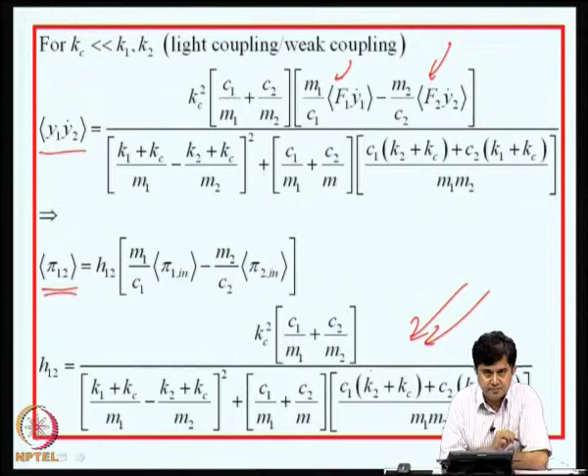The SEA equation, the equation that you will actually solve when you apply statistical energy analysis, will be in this form. The unknowns are these energy levels EI and EJ, this is E1 and E2 in this particular two subsystem problem, and the excitations or inputs are in terms of power, pi in i, pi in j, this is known. These are unknowns, and this is analogous to our stiffness matrix, but this is known as the matrix of coupling loss factors.

Typically, these coupling loss factors could be estimated experimentally, where difficulties associated with joint flexibilities and randomness in the system properties can be taken into account, or analytically using wave propagation concepts. I will not get into that.

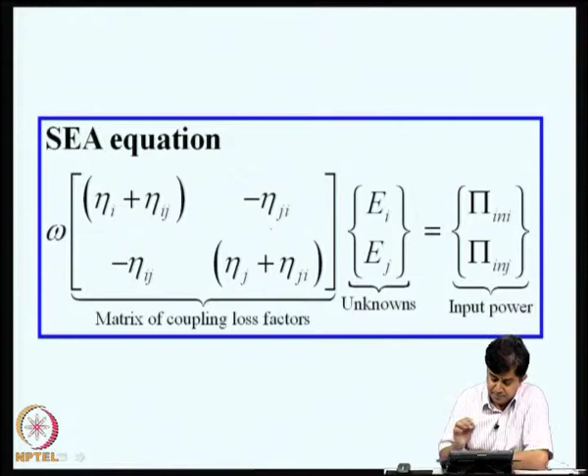The same logic if you apply to a set of n subsystems, we get the unknowns as E1, E2, E3, up to ENS, where NS are the number of subsystems, and pi in 1, pi in 2 and pi in NS are the inputs, and this is the matrix of coupling loss factors which has to be determined either experimentally or analytically, and the principles of random vibration analysis are relevant in this context.

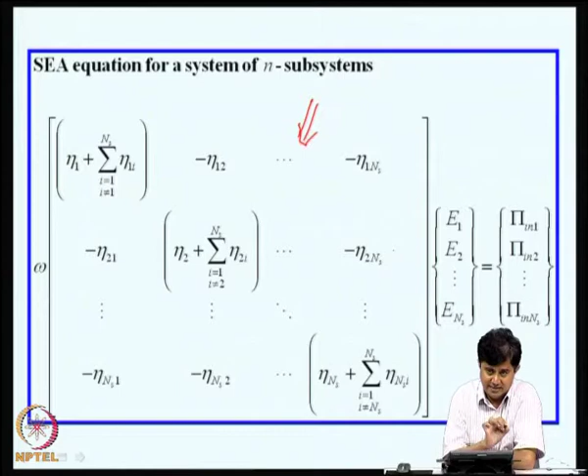So, the subject of statistical energy analysis is quite vast, and I have given you a few suggestions for further reading. There is a review paper by Fahy, Statistical Energy Analysis: A Critical Review, and there are two papers, one by Langley and another by Keane, which contain quite useful information.

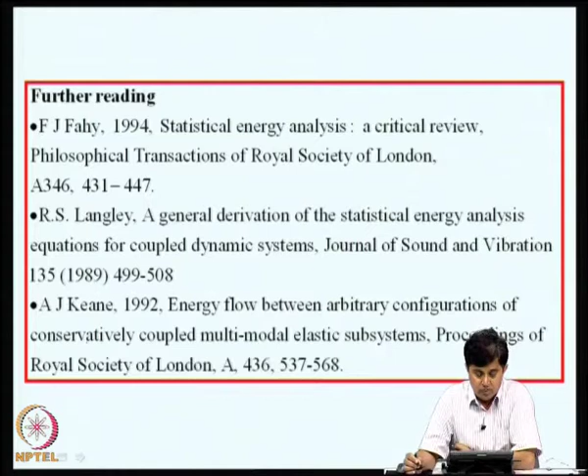Now, with this we will conclude this present lecture. In the next set of 4 lectures, we will consider certain problems which would basically help you to learn the subject. So, the discussion on principles of random vibration analysis and the methods and basic problems now closes. In the remaining 4 lectures of this course, we will consider a set of problems and tackle them. We will conclude this lecture at this stage.